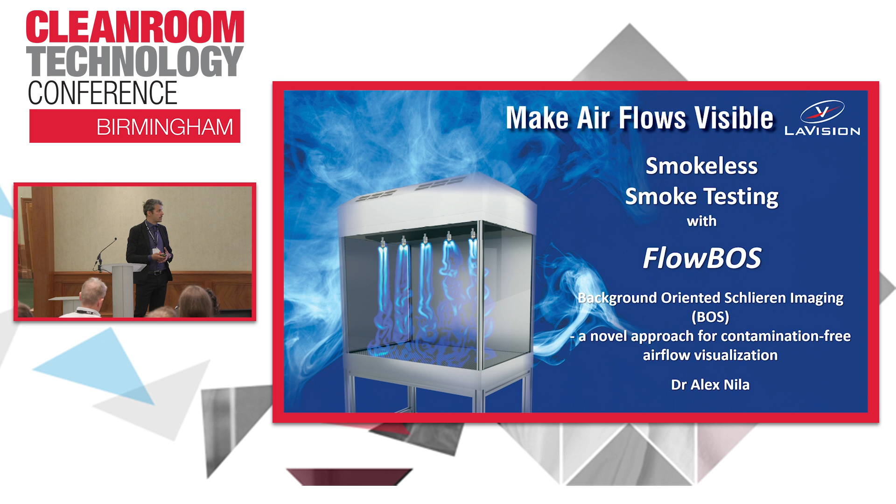A little bit about myself. I'm a PhD. I'm based in Brussels. I did my PhD in Belgium, and I was studying fluid structure interaction. I was specializing in a technique called particle image velocimetry, looking at quantifiable fluid flow for ocean engineering applications.

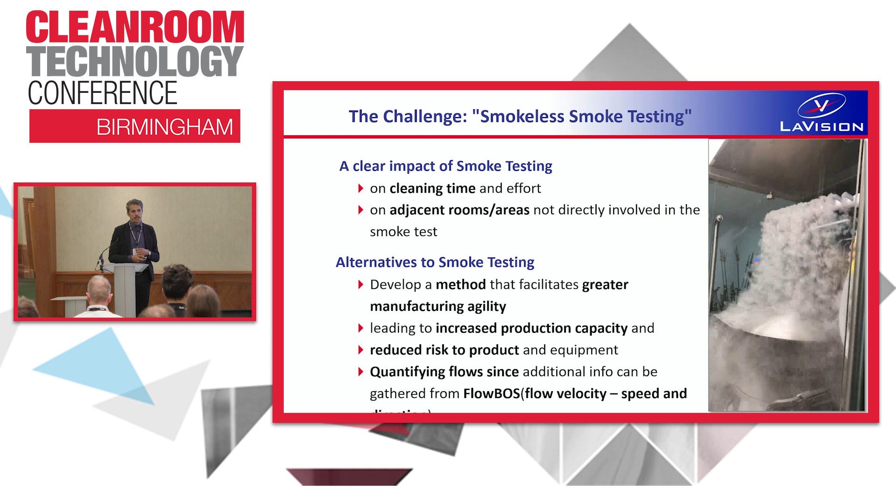We also wanted to have something that might be useful in a more inline production kind of setting that doesn't affect adjacent areas and rooms that might not be a part of the flow monitoring process. So what we want to aim for is an alternative method, an alternative technique that produces this greater manufacturing agility, that reduces this downtime that is caused by the cleaning time with traditional smoke testing.

We also wanted to have a technique where we can use our existing expertise. And as you've seen already, our existing expertise pertains to quantifying flows. So we wanted to see if we can get anything out of the flow visualization. On the one hand, it's obviously nice to have something that's contamination-free. On the other hand, it would be even nicer if we can also put some numbers, for instance, on flow velocity. And we're going to talk about this later on in this presentation.

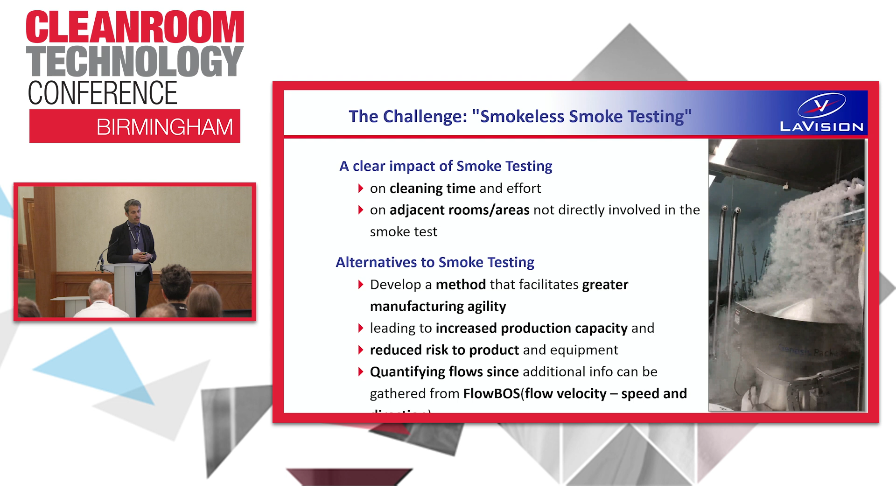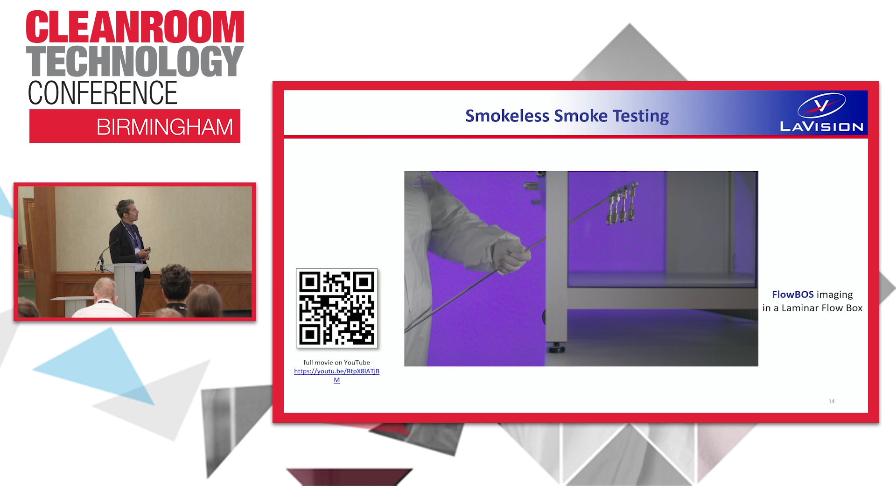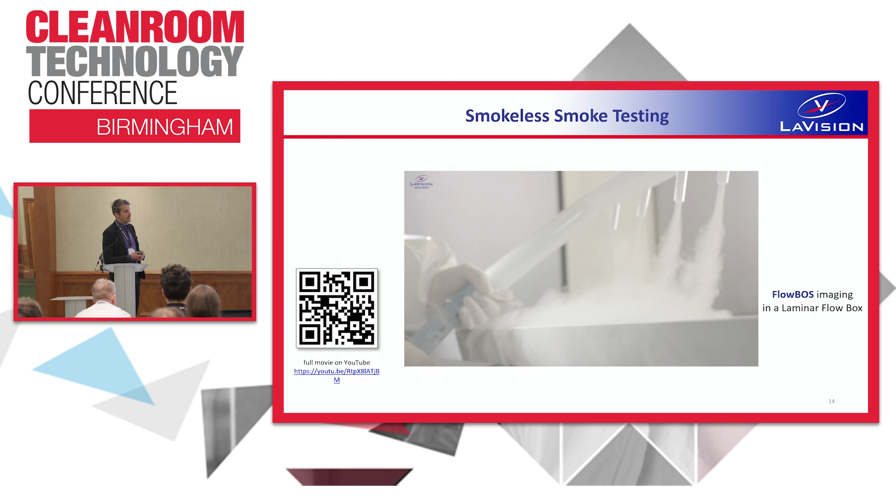So we came up with a technique, and we obviously needed to have a sort of name for it, and we kind of went for this smokeless smoke testing. You can see here how this would look in an actual environment, and you can see a side-by-side comparison of smoke testing and this so-called background-oriented Schlieren or BOS airflow tests.

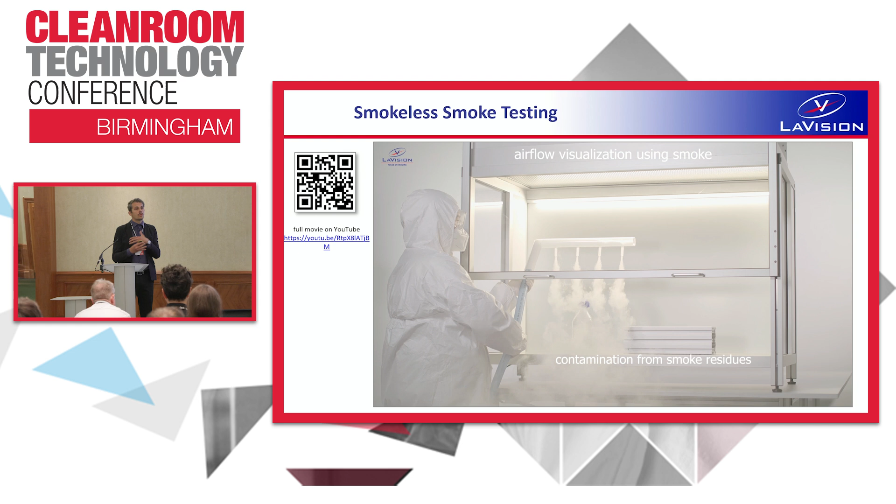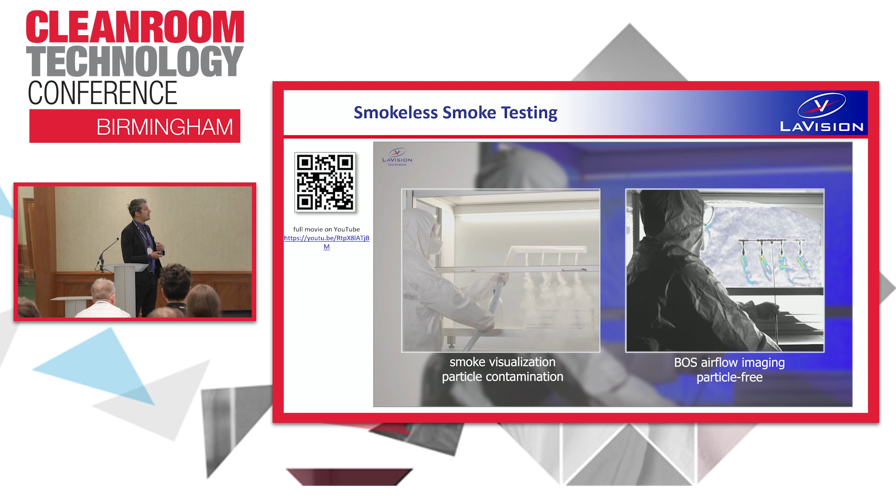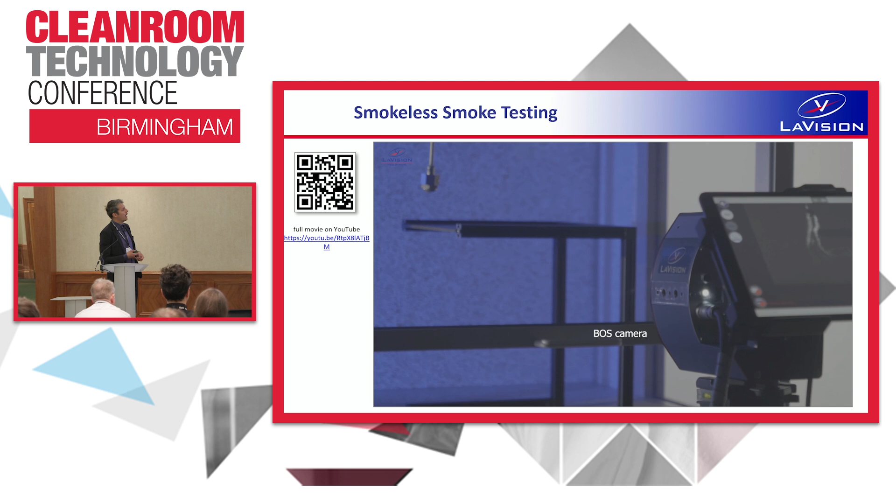Obviously, there's a need to look at certain different test procedures, test protocols, and also environments where these techniques would be applicable. So we wanted to see if we can have something that is as intuitive to use as classical smoke testing, as easy to use in typical environments, but that can produce something which is contamination-free. And you can see here on this movie some nice examples of identifying recirculation eddies, looking at turbulence, and this is done on the fly. This is done with this so-called FlowBOS camera.

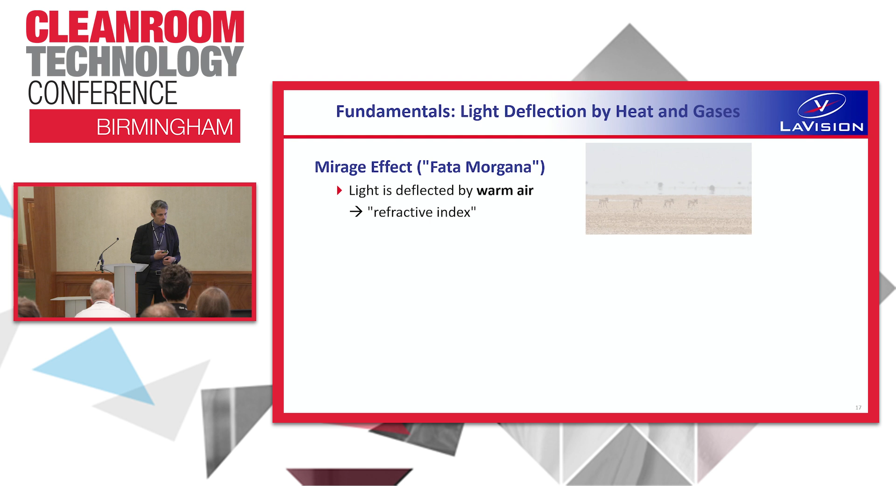So we're talking about BOS, we're talking about FlowBOS. How does this actually work? What does this entail, and what is the technique based on? Well, this is actually quite an intuitive technique that we're all quite familiar with. If we look across a highway on a hot summer's day, we will see the heat rising from the asphalt, which is heated by the sun. This is the so-called mirage effect, and this is a Schlieren effect that we observe, these streaks of warm air rising from a heated surface.

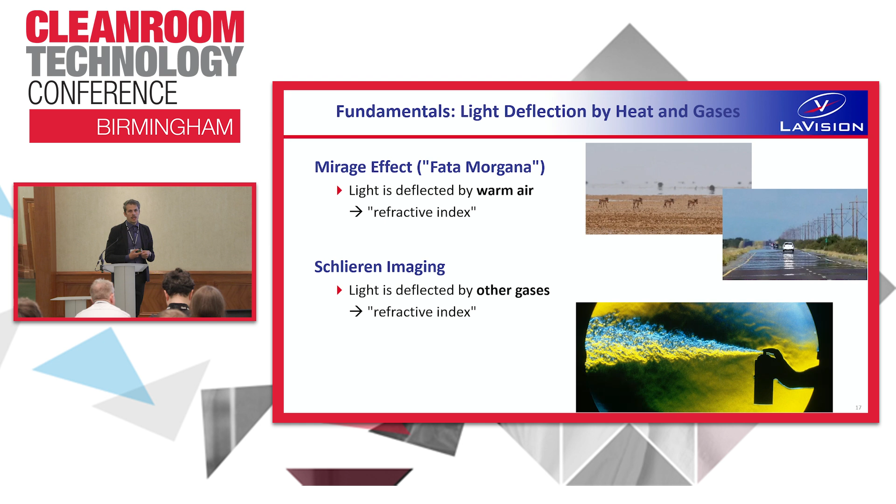Now, in order to quantify this, a technique called Schlieren was developed, but this was actually developed not for fluid flow characterization. More than 100 years ago, it was developed for inspecting the optical quality of glass. Obviously, as you might have guessed from the name, this was developed in Germany. But then this technique was later adapted and applied for airflow investigations.

Particularly NASA, for instance, was looking at pressure gradients. They were using this technique to enhance and visualize pressure gradients, for instance, in the presence of shock waves in supersonic flows. This technique involved a very cumbersome setup. We were talking about high-grade optical mirrors, very expensive mirrors, looking at very small fields of view. So this wasn't scalable at all, and it required very skilled scientists to be able to apply it.

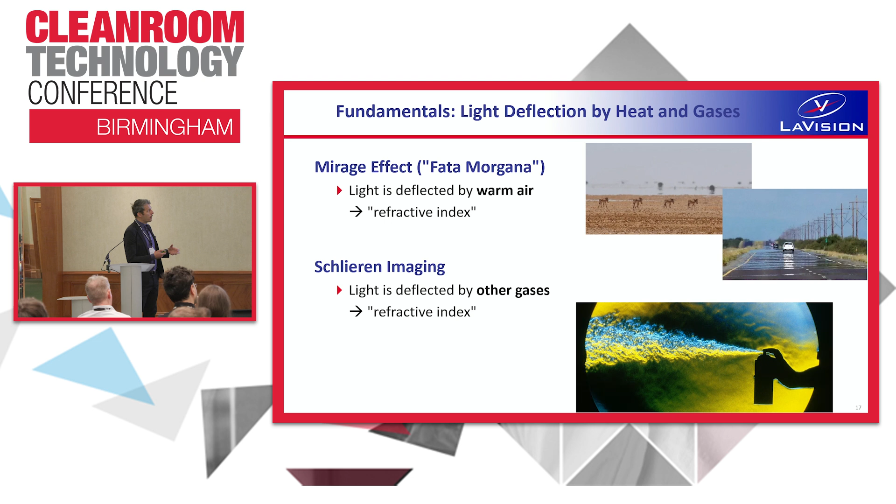However, this was later adapted, and a new technique was introduced. That was originally called synthetic Schlieren, later to be called background-oriented Schlieren by the German aerospace center, the so-called DLR in Göttingen, where initial tests were conducted with this technique. Now, how does this work? Well, we're replacing this need for complex mirrors and light sources and knife edge with a static background pattern.

And this background pattern can be a multitude of approaches. We can have printed patterns, displayed patterns, projected patterns, or even the natural pattern. And actually, this background-oriented Schlieren approach was first deployed using natural patterns. NASA flew a camera at 30,000 feet, took images of a natural background from the desert, and flew fighter jets to visualize the shock waves emanating from them. So this is how it was used for these large-scale outdoor measurements.

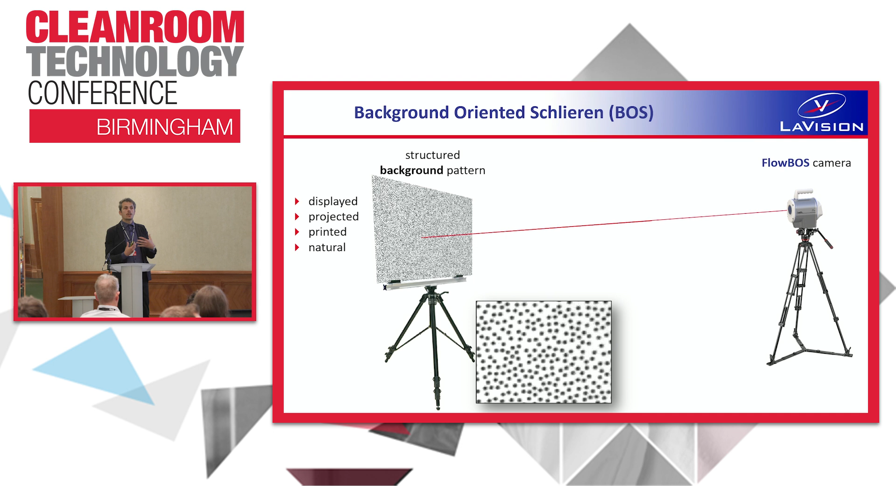But we are typically interested in also applying this indoors. So we would have these sort of patterns. And the main feature of these patterns is that we want to have a randomness to them and a good contrast of the features. We're imaging these patterns with the camera. And as soon as we introduce a refractive index change along the line of sight, this will deflect the light ray between the camera and the background pattern, introducing this apparent displacement. This is something that we can also see by naked eye when we're looking at these heat waves generated from a hot surface.

Now, what we're doing is we're using a smart algorithm to transform and enhance these displacements into something that we can easily use as an intuitive flow visualization technique. One thing to note is that this refractive index change can be introduced by several factors. We're not talking here only about heat changes, so temperature gradients, but we can also be looking at density gradients as well as pressure gradients. So we have quite a few different sources of this BOS signal.

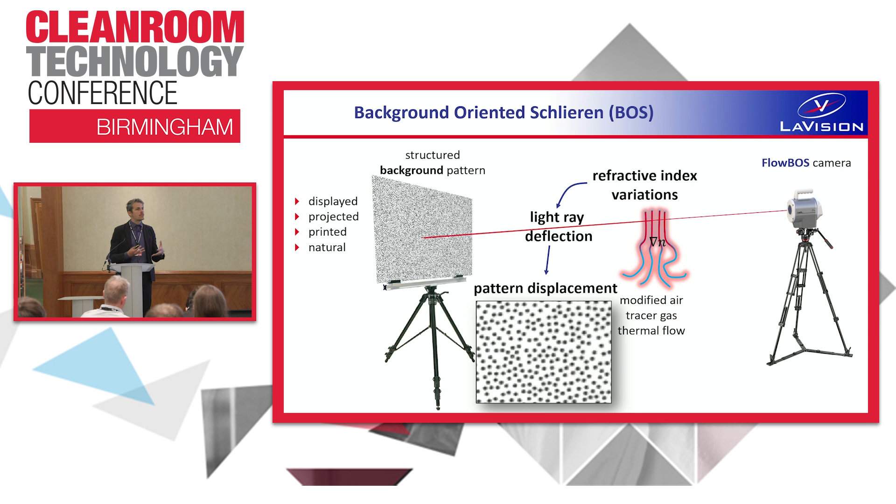Okay? So based on this, we saw that we can apply it on a number of different applications, but more importantly, on a number of different scales. So we can really scale this technique up very easily. We wanted to aim for a quick setup, and this provides us with a quick setup as we only need this background pattern and the camera. And we didn't want to bother with a lot of alignment processes like with classical Schlieren, right?

Now, of course, this technique can be used for a lot of different processes, from mixing monitoring to airflow visualization and even leakage detection. But we also wanted to go a step beyond and look at some quantitative output from the technique. This is what we'll talk about later in this presentation. We can actually apply some other smart algorithms to use the signal to get some quantifiable flow velocity measurements from the data.

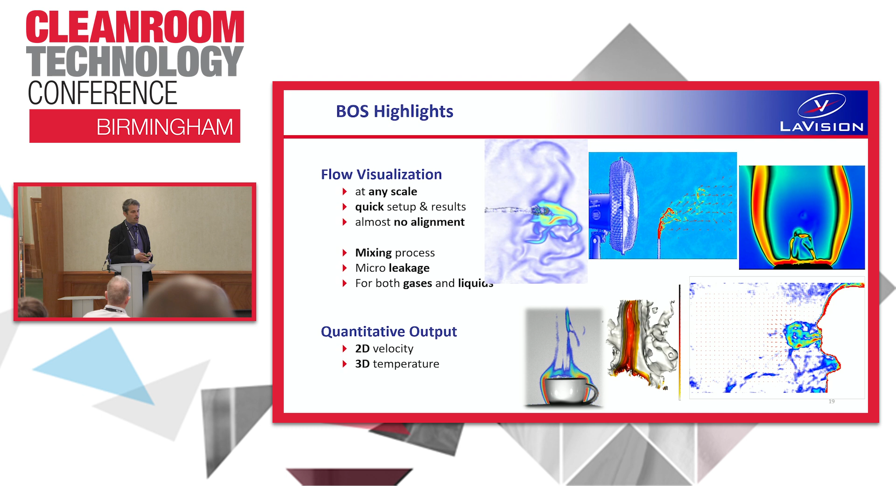Now, how would this look in practice? Well, we have here just a simple lab setup, just showing the principle. The pattern in this case is displayed. So we have a screen that's displaying the background pattern, and then we have this air gun, and then we have the FlowBOS camera showing us this live BOS movie.

Now, one critical part is that we have the means of not only recording a live movie that you can use to monitor the process as you're in the test setup, but actually saving it and doing further high-quality rendering after the fact that might get you even higher sensitivity of the data from the same raw movie.

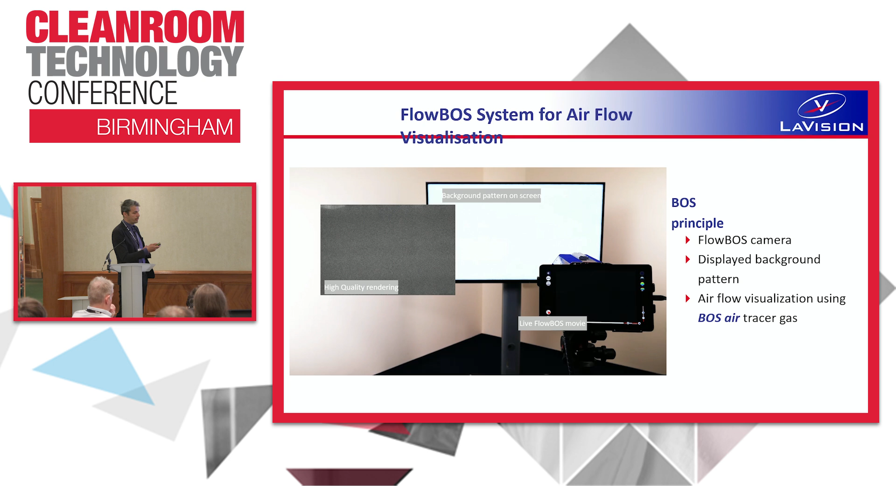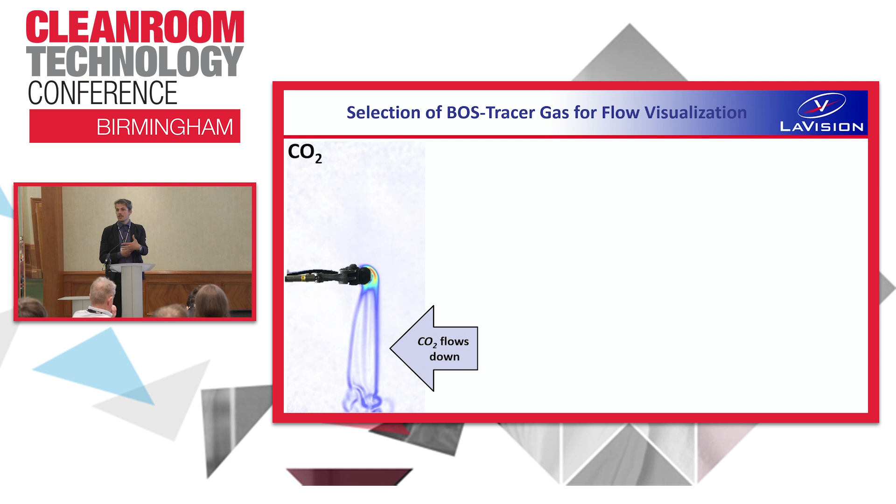Now, as you've seen there, we have an introduction of a seeding gas. This introduces the density gradients that we're looking to visualize with the BOS signal. We wanted to have a look at a few different gases. There's a multitude of choices that we can consider. What we wanted to go for is a gas that is non-toxic and non-reactive. This is the key point to have it useful in a clean room environment.

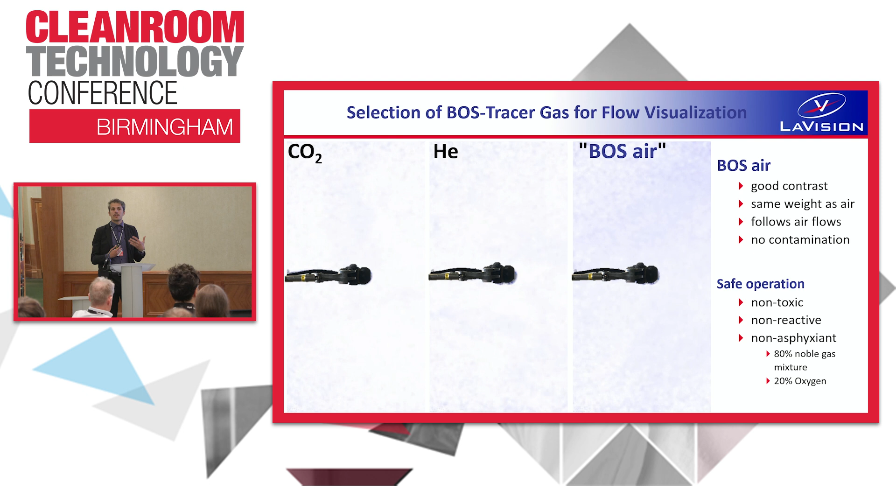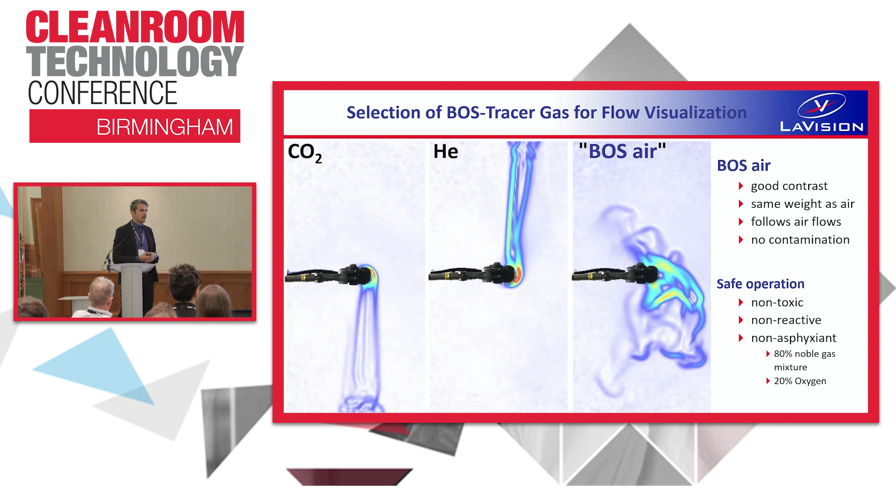But at the same time, we wanted to develop this so-called BOS air that has the same weight as air. When we're talking about density changes, we could easily see how different gases would either flow down or flow up because they have a different density. But if we have a mixture of noble gases with some oxygen, we can reach the same weight as air. So we don't have any inertia of the gas as we're introducing it into the flow, right? So it really becomes a tracer gas.

So this is the basics of how this technique works and how we thought about the layout. But what is important, especially for you, is to see how this works in the field and how it would look in actual clean room environments. So I'm going to talk a little bit about some applications. I'm going to start off with this room return airflow test.

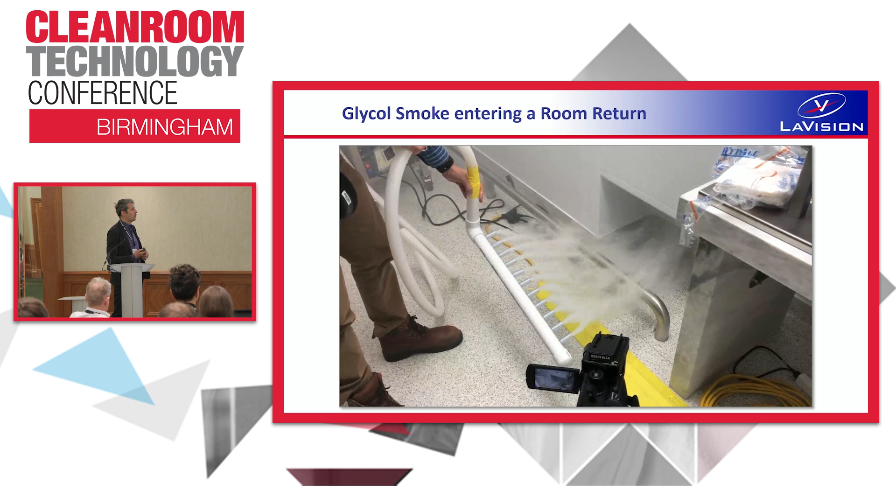This is a very, very simple test where we first looked at just smoke testing to begin with. We wanted to compare with this smoke test and see how the flow BOS approach would produce similar results. So we saw everything is pretty much where it needs to be, and we went ahead and did some flow BOS visualization on the same room return.

What you see here is a seeding rake. We're introducing this BOS air through the seeding rake in a very similar fashion to what you already know from smoke visualization. So we have a multitude of nozzles introducing the BOS air, and here you see the live processed movie with the BOS signal. One thing to note here is that we didn't print out the pattern, but we're actually projecting the pattern on the floor, and this is what we're using as a background pattern in this case.

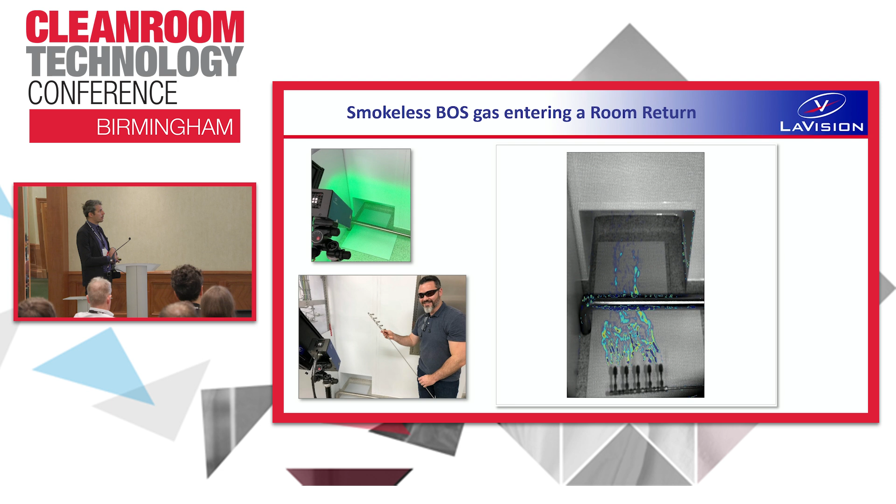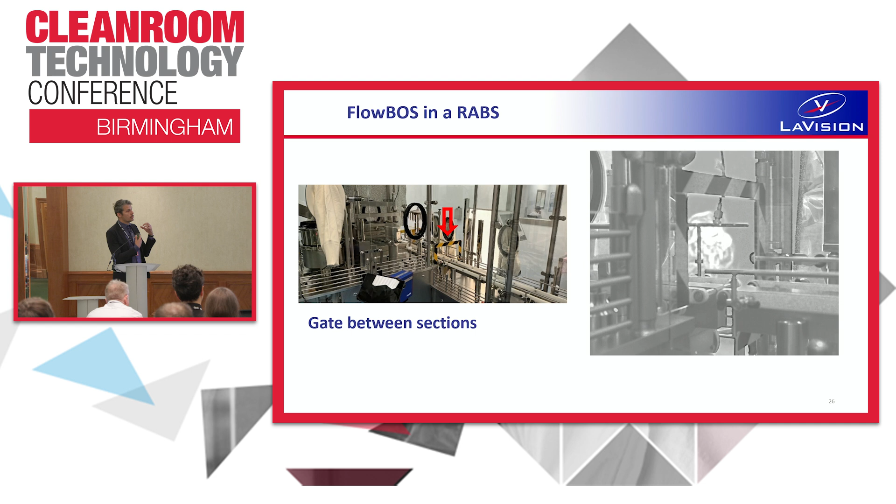Another example, here we're looking at RABS, and we're looking at the gate between the sections. So we're introducing, again, the BOS air. You can see here the camera looking onto a displayed pattern in the background. So again, even though we have a lot of things going on here, we have a lot of structures in between the camera and the background pattern, we do manage to have a clear line of sight. So we do manage to see the BOS signal quite nicely.

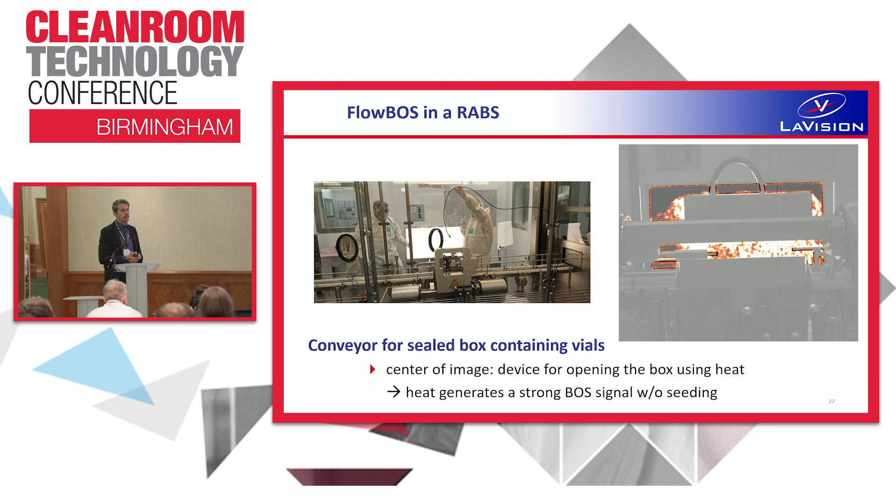Now, one important factor is that, again, because we're not only looking at density changes to produce a BOS signal, we're also looking at temperature changes. We also had, in the same environment, a case where we were using the heat signature from the device to actually visualize that. And here you see a nice switch over to a different color scheme where we're actually seeing Schlieren produced by the heat generated from this enclosure.

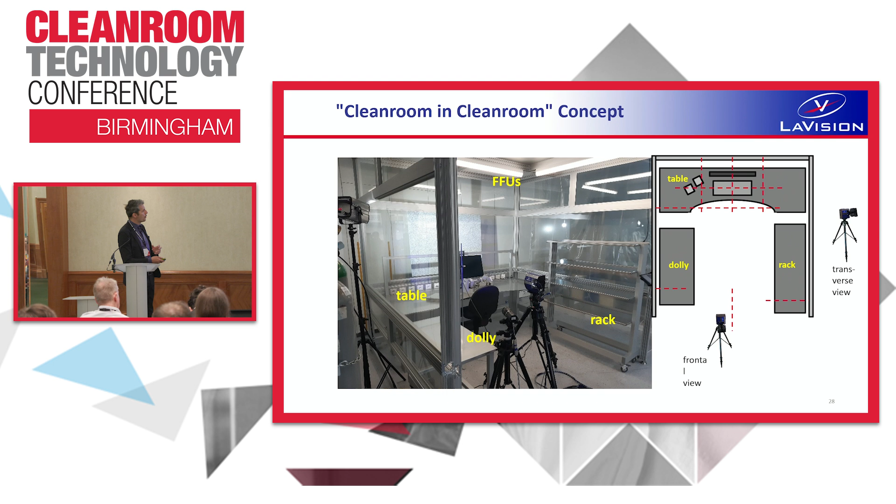All right, another application example is this clean room in clean room concept. And this is something where the main focus was to test out different optimization of the clean room environment, including the workstation and also in the presence of an operator. And in this case, we had these measurements conducted in Switzerland where we had different positioning of the cameras and background patterns in order to achieve flow visualization at these different locations, which are illustrated with a red dashed line. So we had a few different scenes that we wanted to accomplish, and you can see them here for 3 different examples.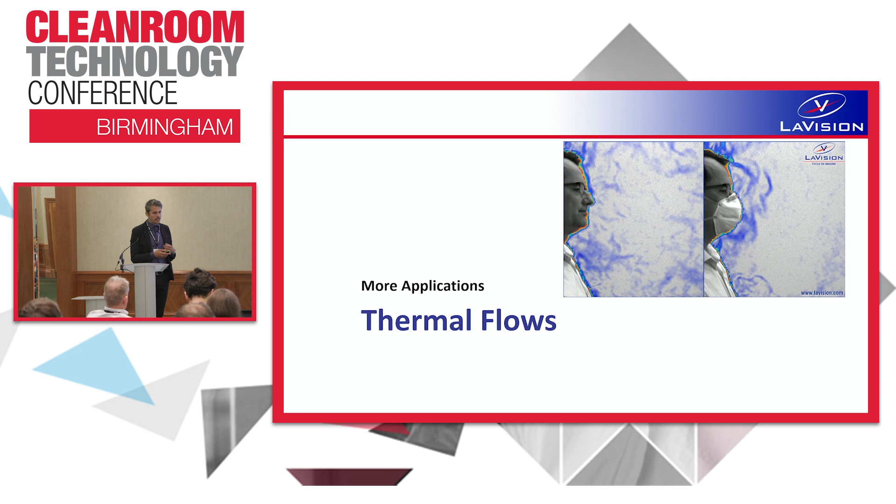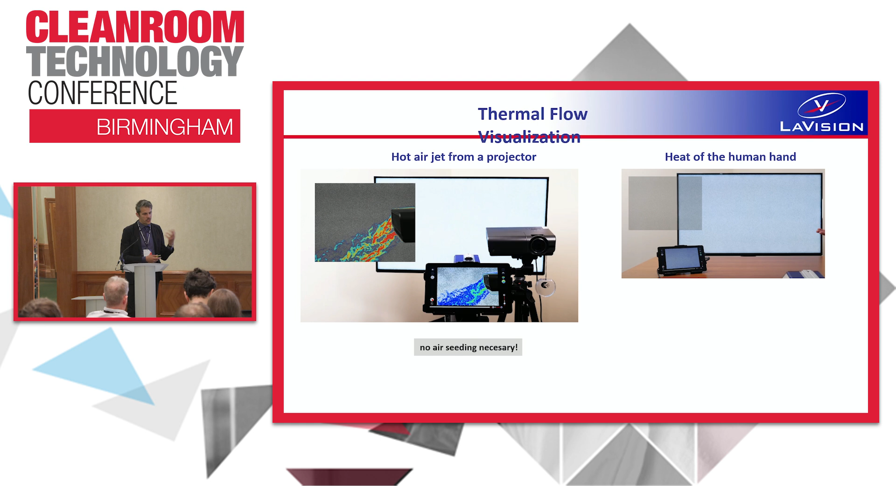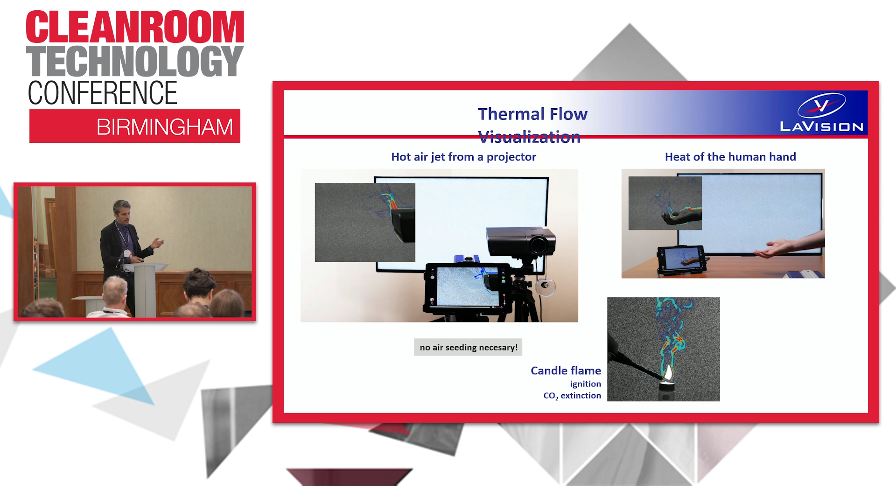So this was picked up on quite quickly, but there were a lot of other application areas that we're able to look at with the FlowBOS approach, and this is one of them, just heat generated from a projector. As I mentioned, the sensitivity of the technique is quite high, so you can see here just the heat generated from a human hand, how it can be visualized with FlowBOS, on the fly. Another example here, just a simple candle flame ignition extinction using CO2, and this meant that there was a lot of interest in HVAC industries, where they looked even at the AC effects in an automobile.

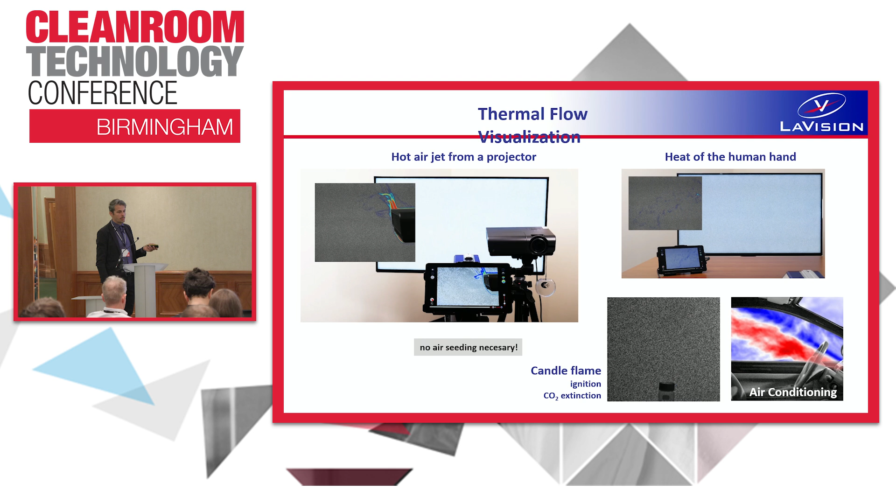Another example here, thermal flow of a compounder. This was a very interesting application. They were looking at optimizing the positioning of this extractor.

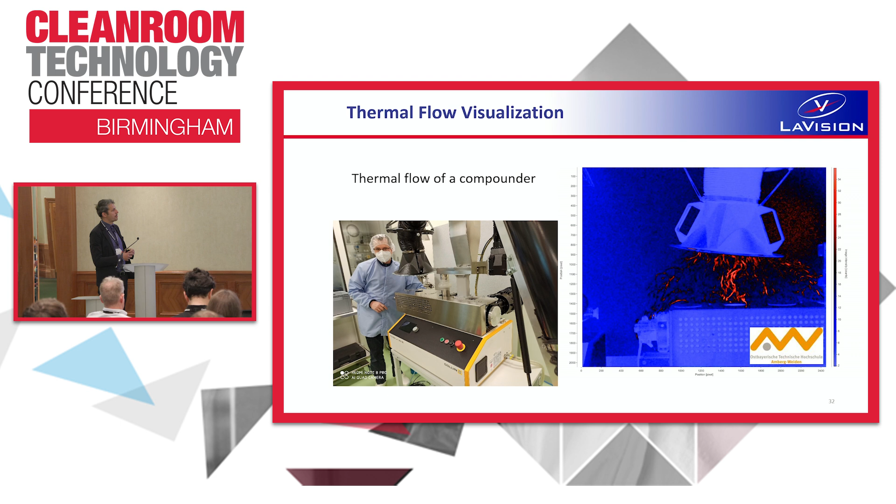And this obviously can be done on the fly, because you can have this live BOS signal, and you can change the position to see where you get the highest efficiency of the extraction.

Now, as I mentioned at the beginning of this talk, we wanted to also see the potential for getting quantifiable results. And again, coming back to these COVID times, we had a lot of our customers look to use BOS for qualitative investigations. One such group was that of Dr. Ignazio Viola in Edinburgh, who really did a very systematic test looking at the effect of face coverings. They also developed a mannequin to have a very reproducible test.

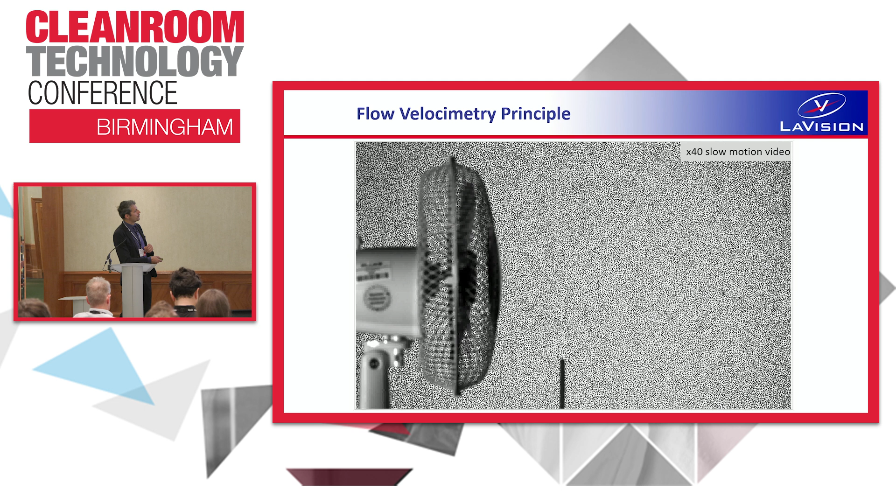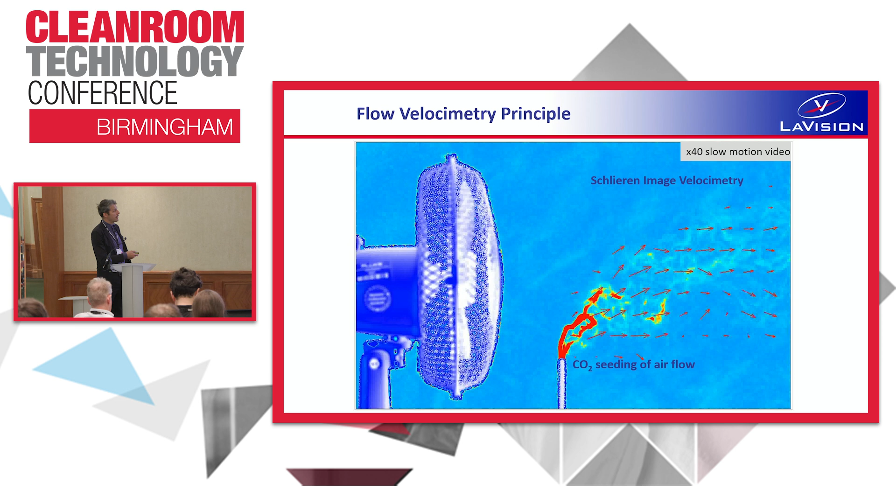So we decided, okay, why not actually use the BOS images instead of these contamination-introduced tracer particles, and use the BOS images to look to quantify the fluid flow. And this is what we did in this particular case. To look a little bit more in detail, this was an example where we used CO2 to see this airflow produced by a fan. And we had the BOS signal, and by applying our PIV algorithms, we end up with something that we named Schlieren image velocimetry. And this is basically showing us this vector field associated with velocity, magnitude, and direction that is given by the actual Schlieren in the images.

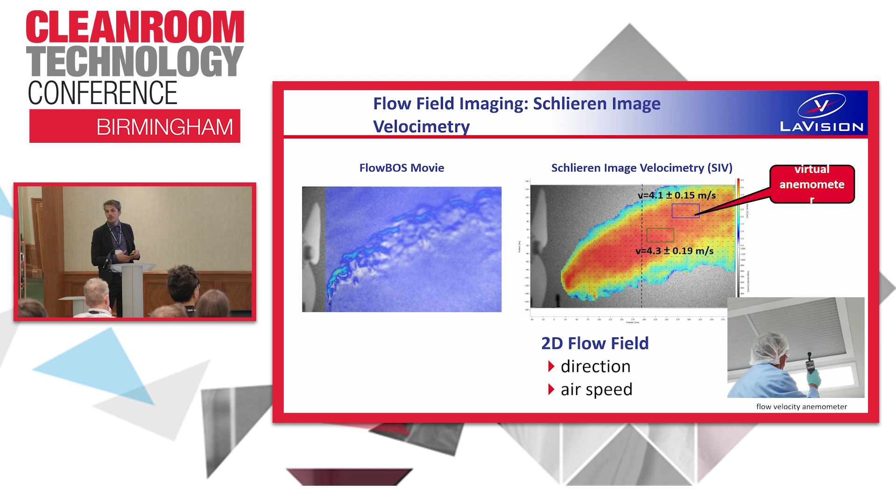Now, why is this important? Because we can imagine how we can use this for having a sort of virtual anemometer, right? We're all familiar with these point-wise devices that we can introduce in the flow to quantify our flow, but this can be done after the fact on full field images in the flow, or even live on the BOS images as we're processing them. So we would have something like this where we see the flow BOS signal, and then we can choose a region of interest where we can get velocity, magnitude, and direction.

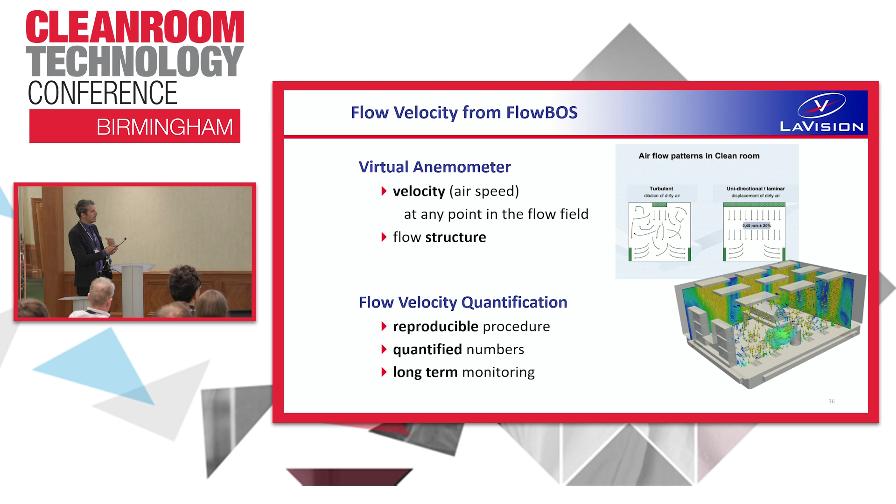Obviously, this would make it quite an interesting proposition to get not only velocity magnitude, but also some information about the flow structure once we couple it with this flow BOS approach. That means that we can have this reproducible and traceable measurement technique that is a little bit easier to understand rather than a point-wise measurement that is given by a handheld device.

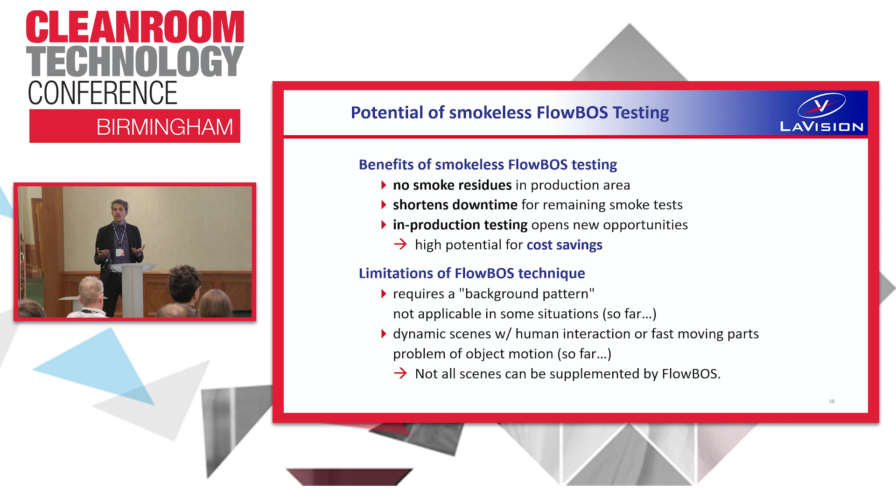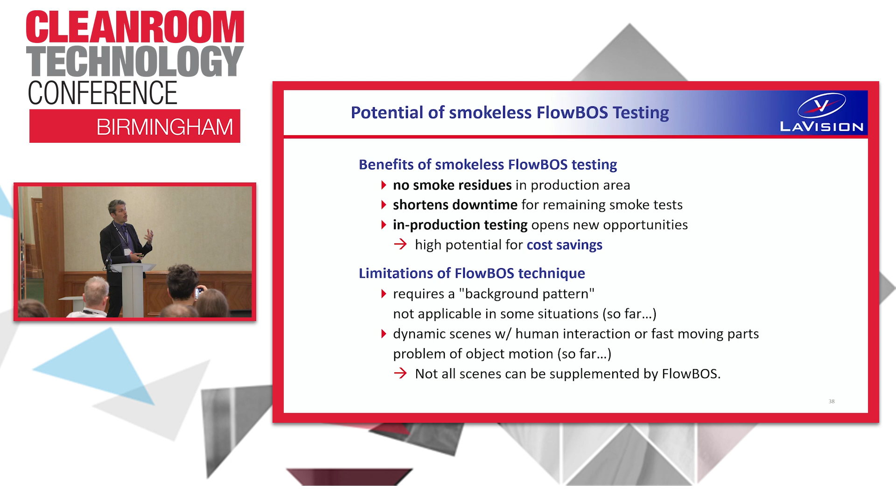All right, moving on to some conclusions. So obviously, we saw that there's some benefits to this kind of smokeless flow BOS testing. We set out to aim to not have these smoke residues and therefore to shorten downtime of production areas and ultimately lead to cost savings. There are, of course, limitations of the technique. We don't foresee that this will completely replace smoke testing, particularly because there is this requirement of having a line of sight approach. So we need to see the background pattern as we're applying it in, for instance, a cleanroom environment. So not all of the scenes that we might be testing can be supplemented with flow BOS.

However, we see this as a complementary technique, and we're certainly looking forward to also get your feedback into how you could potentially see this technique being applied in your specific test cases, and how this could actually help cut down the downtime associated with typical airflow tests as it is right now. Obviously, we're also seeing some potential in inline testing, because since this is not introducing any contamination, we could perhaps see this as a round-the-clock flow monitoring process that can pinpoint some issues in production.

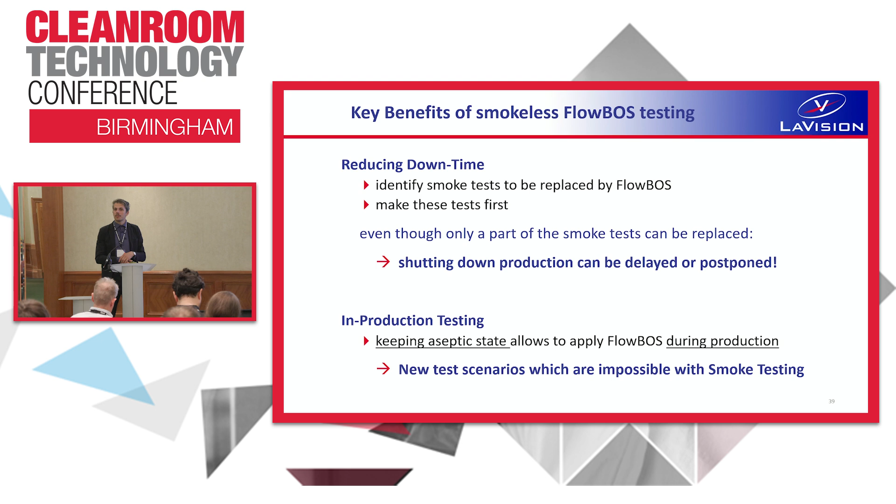Now, I know that this forum is probably more focused on the part of the presentation so far, but I wanted to also introduce a couple of slides to show some potential, something to look forward to and see if this is something that might be of interest. We've applied this flow BOS measurement also in conjunction with our tomographic reconstruction capabilities. So in flow measurements, we have the means of looking at fluid velocity in a two-dimensional slice, but we also have algorithms that allow us to do a 3D reconstruction of the flow field. As long as we have a 3D illumination, we're taking images from different perspectives, and we can recombine this into a volumetric reconstruction. So what we decided was to apply the same principle to the BOS approach.

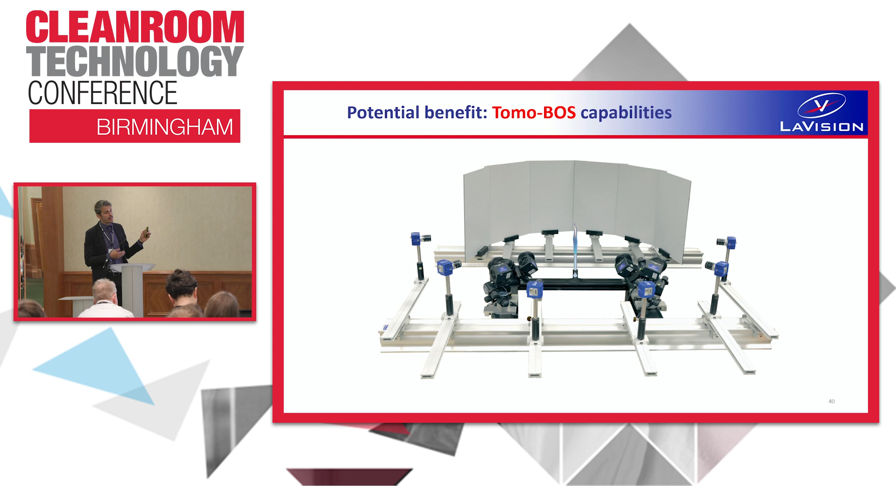And here we have different cameras. These are scientific imaging cameras, 6 cameras, and background patterns corresponding to each of the cameras. And then we're having some airflow introduced, a burner of some sort. And then we're taking these independent 6 views that you can see right here, and we're running this through a tomographic reconstruction algorithm.

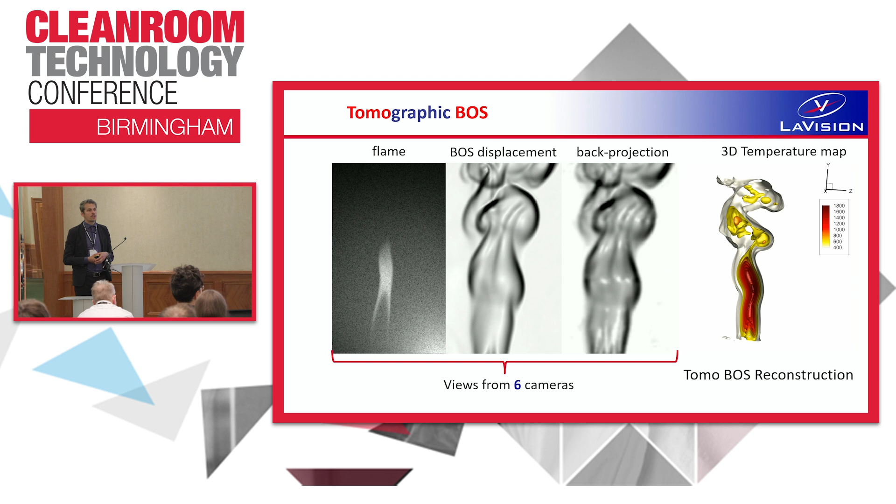Now, the key benefit of this is that on the one hand, we can get this 3D shape of the plume generated, and it could be a thermal plume, it can be just a density change plume. But at the same time, we can get physical quantities such as temperature, right? So in this case, obviously, we have a temperature difference, and we can visualize this temperature difference on the reconstructed results.

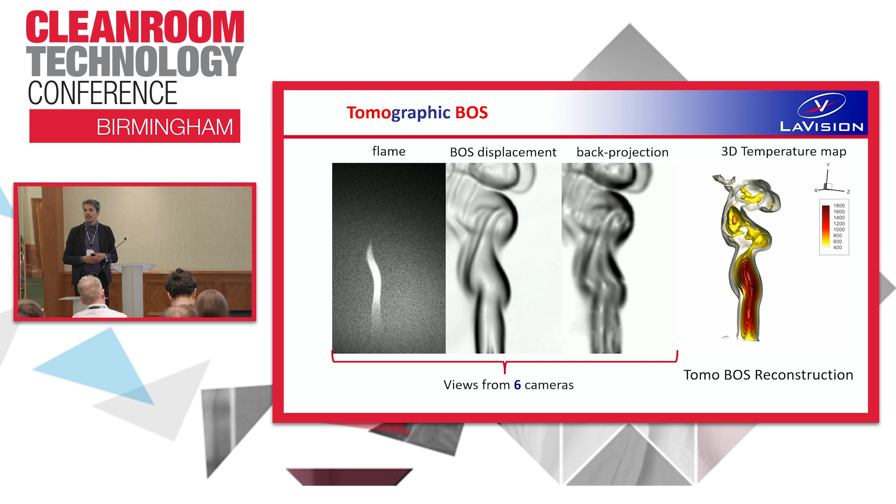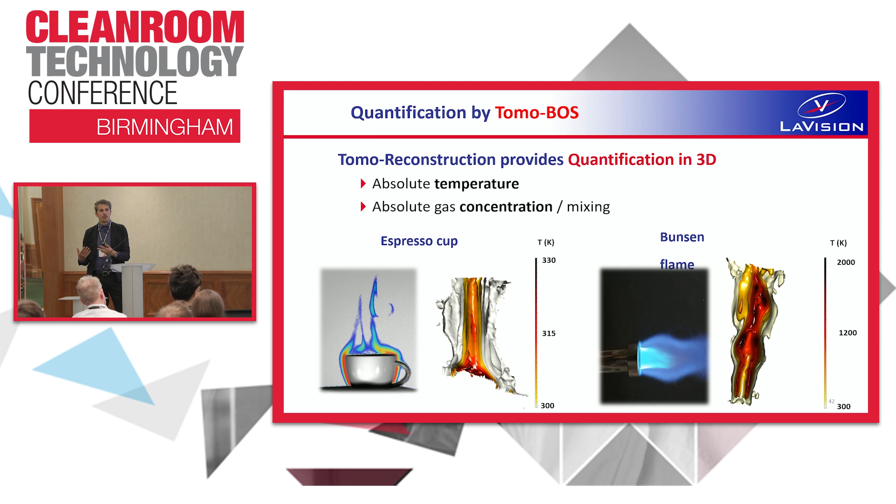So obviously, you can see that this is a little bit more involved. This is a little bit more in the scientific realm, but this can have potential to actually give us even more quantifiable results after the fact. And here are just some slides where we have just a couple of examples, just with a coffee cup and a Bunsen burner. And this is just showing how we can get absolute temperature and look at things like concentration or mixing.